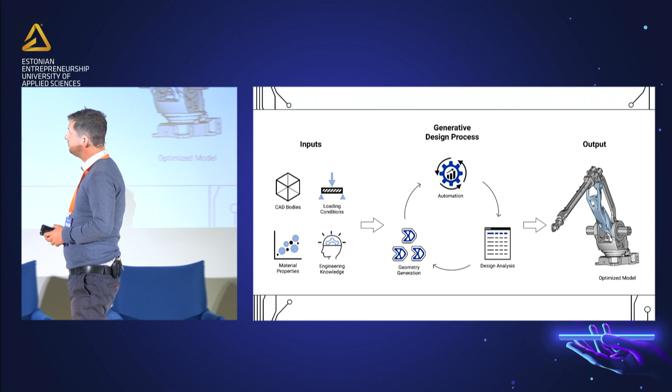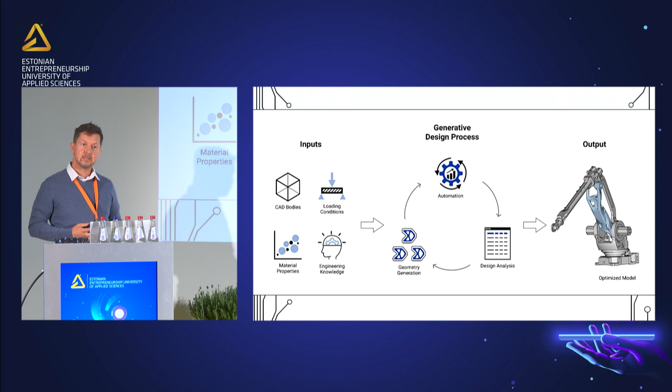What are we actually doing as a scientist? We, of course, are trying to realize our ideas because we are living in a society that tries to think of ourselves as humans who are actually advanced. But is technology so advanced that we cannot resolve some very interesting questions, such as how can I do something, or how can I transfer myself from point A to point B - there are things that are actually universal.

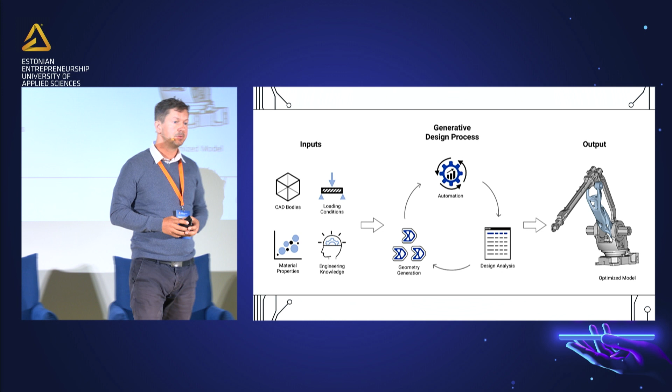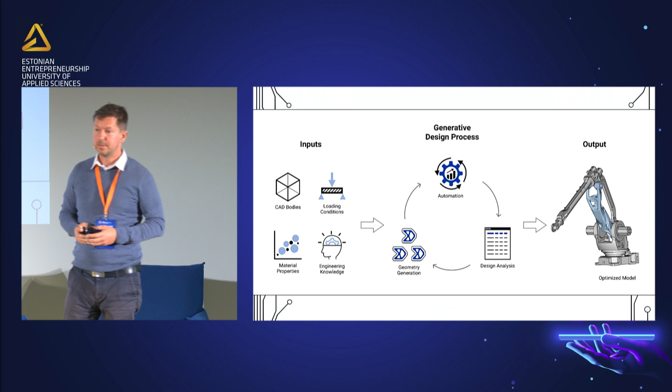Robotic arms, combined with AI, I think present enough challenge, and I will show you today some of the results where we succeeded in applying CAE, computer-aided engineering, to additive manufacturing, a bit of CNC machining, and of course some parts of educational production of a robotic arm with 3 degrees of freedom (DOF). That was the first step, actually.

When I mention robotic arm, you're always thinking about some RoboCop who will cut or chop off your head or something. But for me, as a technology enthusiast, I'm always thinking what possible functions those robotic arms could have. So maybe it can take care of your children, the cradle of your babies. Maybe it can bring a glass of water to your old grandmama or grandfather. Maybe it can do lots of interesting stuff and help you if you are a deaf person and you need to learn sign language.

Together with my students from the Faculty of Medicine, we developed one small application, and the program itself can recognize the first 4 letters of sign language. And that's something that is very important.

Why are you so serious? Okay, that's much better.

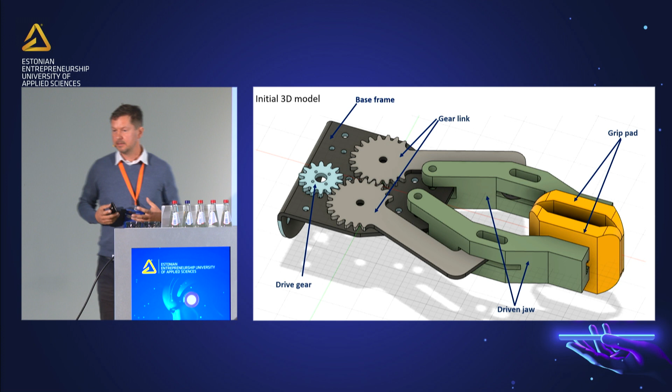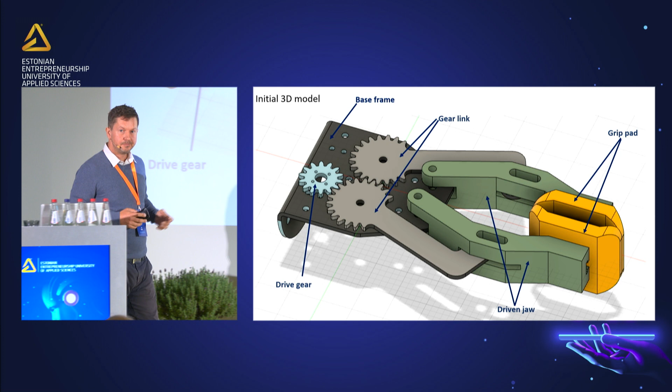Someone mentioned that everything in life should be play, and humans are actually much better at learning and comprehending something if we are playing. So let this event and day be one of the nice games that we can play in order to learn something new.

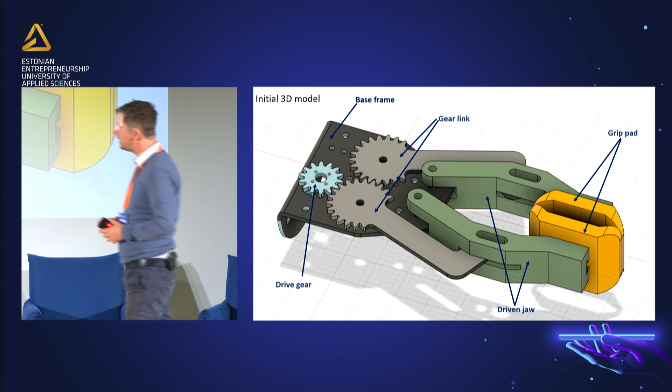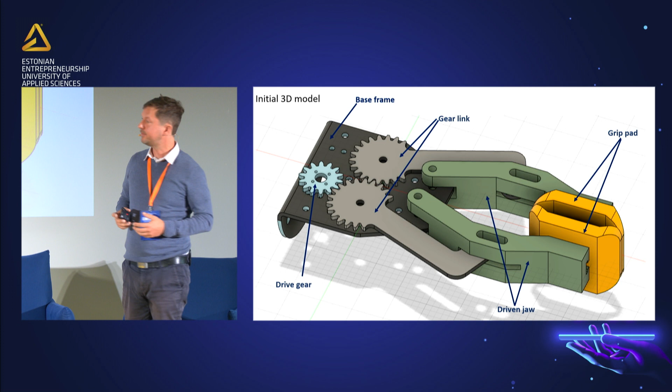The main motivation of dealing with robotic arms was that we would like to achieve and decrease some of the materials used inside. We also did analysis of structural elements, and with the help of generative design, which is based on AI tools, we achieved one remarkable thing: 20% less material and 15% less production time from this initial 3D model.

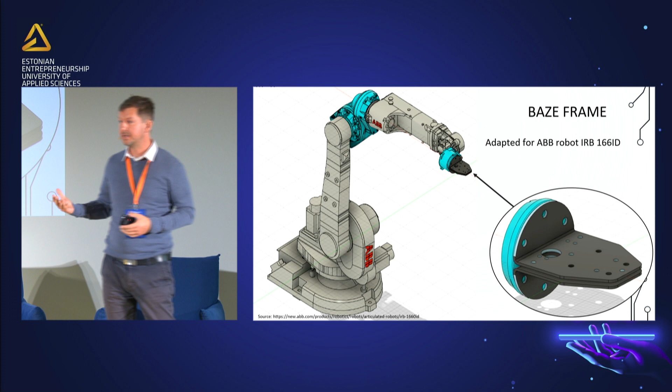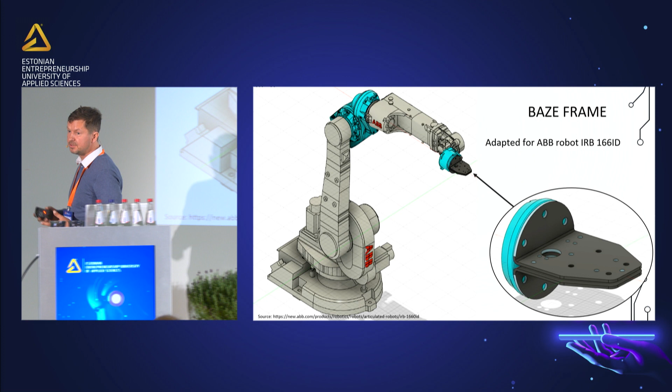The next one was actually where we were going to implement it. So one of the first ideas was standard ABB, which stands for ASEA Brown Boveri, a very famous manufacturer of robotic arms. And we said maybe we can try to make an end effector for 4, 5, 6 degrees of freedom equipment, and therefore we decided to try our best and see which type of technologies we could actually use.

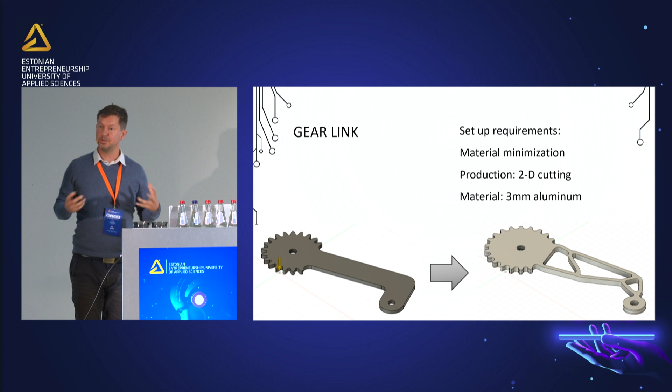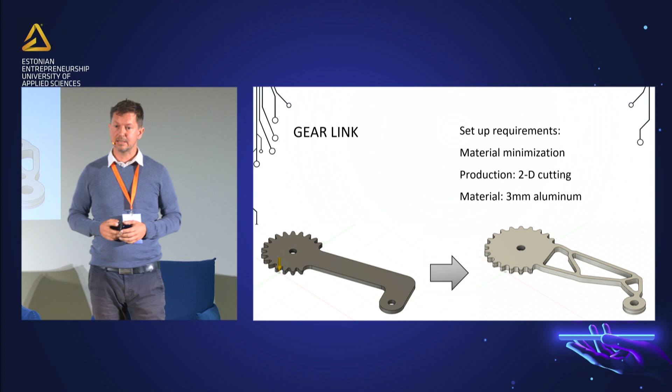So we decided to use 2 types of technologies. First was cutting of aluminium materials, and second one was, of course, as I mentioned previously, 3D printing slash additive manufacturing. From aluminium material, we did the first type of optimization, and it was pretty straightforward. We were very satisfied with the results, and we then proceeded to do the next thing.

Next thing was a bit more complicated. Why? Because when we are struggling with three-dimensional things, we need to take into account several outcomes, such as forces, payloads, moments of inertia, etc. Okay, now it's boring, so you can be serious - then I will stop, no more ice-breaking jokes for you.

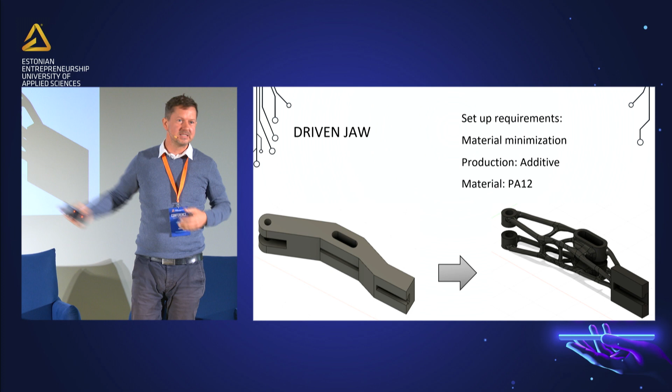Then we decided to go one iteration over another, and after 100 generations, we got this type of solution. For today's presentation, I brought also a live model, so I'll be very happy to show you how it looks like live - not live, I mean in silico, living at the moment in my computer. But we also did 3D printing of the whole model.

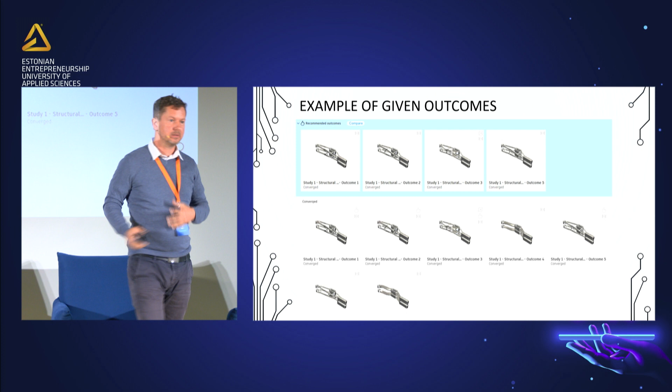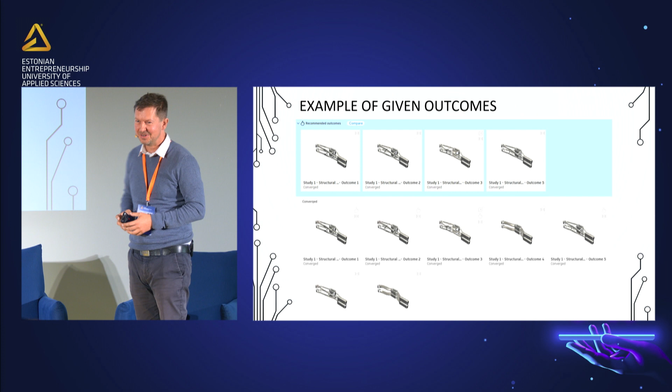So one part of the studying has been presented here. I'll be more than happy to answer all possible questions, and maybe later we can also discuss something in English, of course. My Swedish is also not so good.

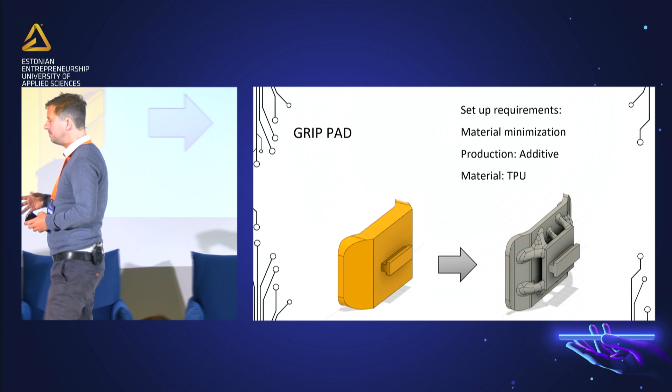What was also important here, actually, for the grip pad we took one very basic element which was not too complicated for us, and then we tried to decrease the amount of material needed to produce it, and to see how many strategies of producing and manufacturing can actually be used to produce this part.

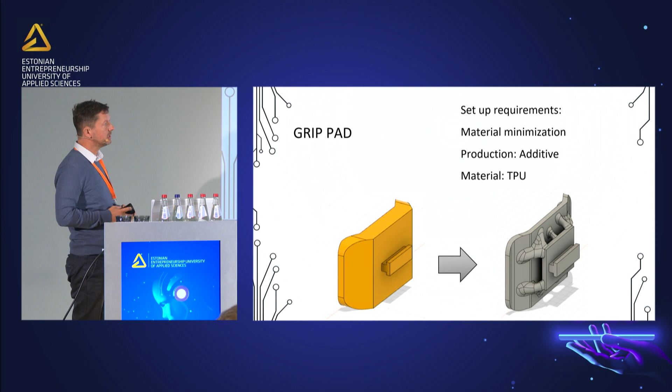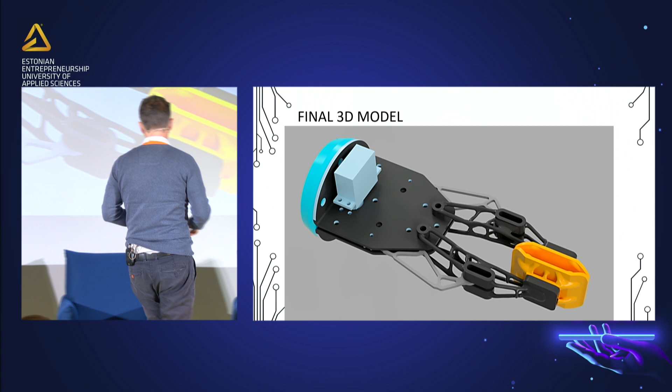So we used TPU material, additive manufacturing, and that's more or less regarding the setup requirements. That was the final version, final 3D model. And as you can see, the things I'm showing here now were actually obtained with the help of AI. So that's the aim of optimization.

How do you like it? Hoping that... Wow, cool. Oh, wait.

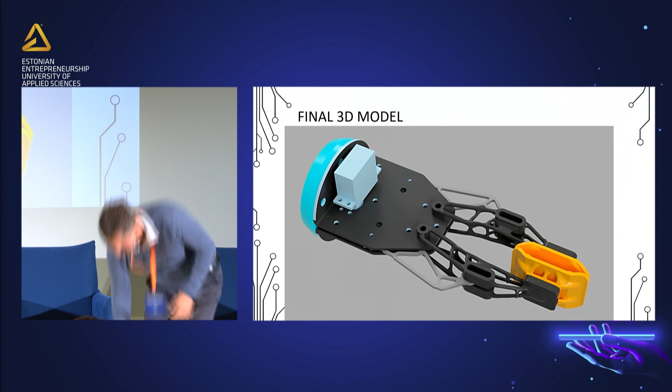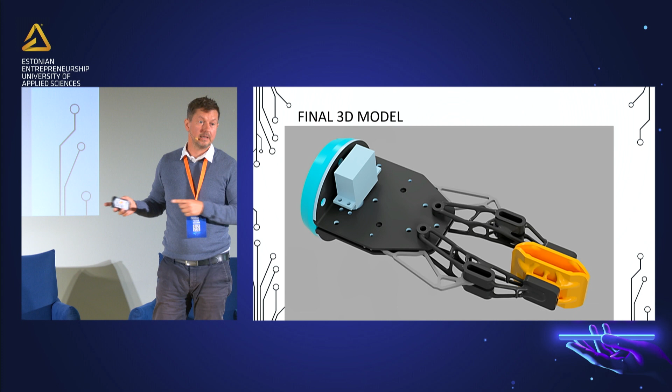Thank you very much. A few more slides, and then I will show you the model in real life, how we did it actually in production. So we tried to work with materials that are on the market.

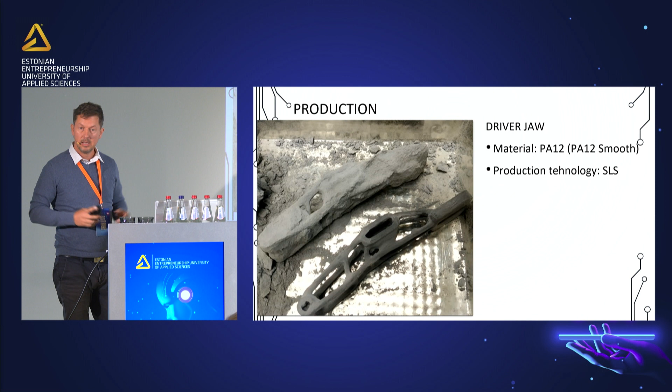In the next iteration, continuation of the project will be to take into consideration environmental materials as well, such as different types of polymers that are more eco-friendly than this one.

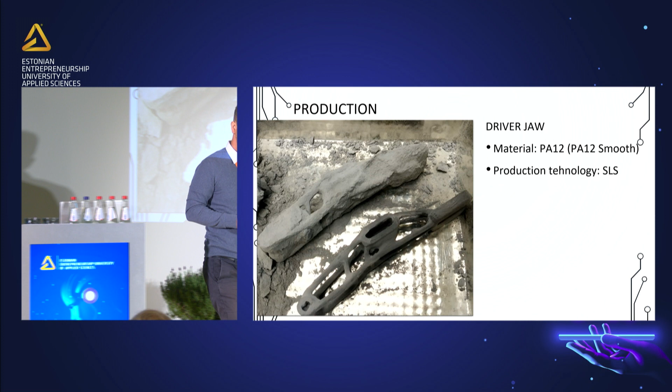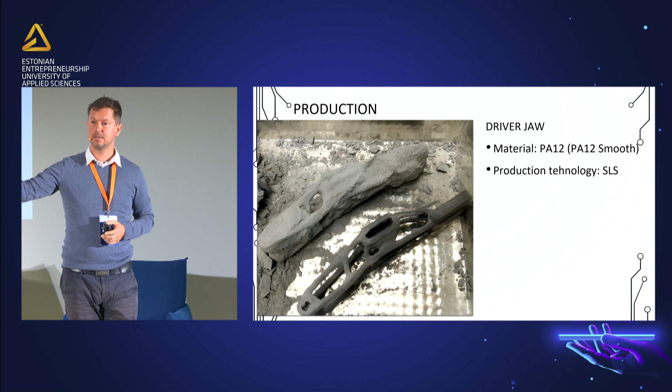And we are also thinking, if we do robotics for children, for kids, that we will collect bottles and try to make from that type of polymer material an effector for robotic arms. Imagine if you can collect 100 bottles, and in that way you can donate to a kindergarten in your own city, in your town. That's one of the ideas we would like to include.

That's also one part during the production time. Material was PA12, gray standard material, and SLS technology.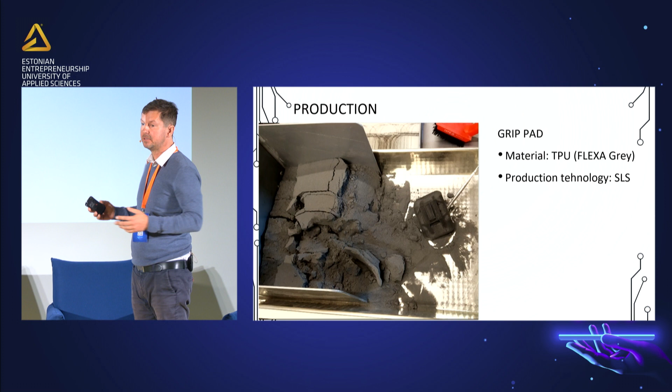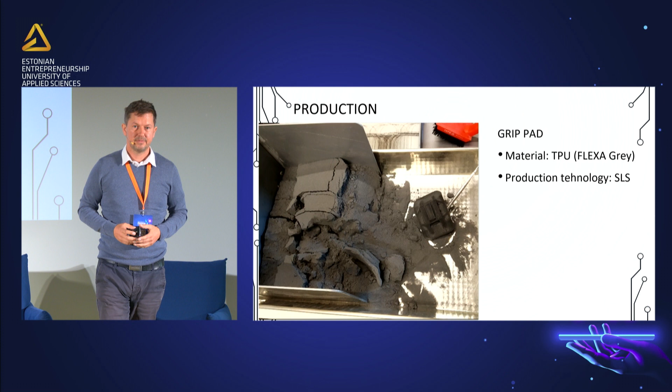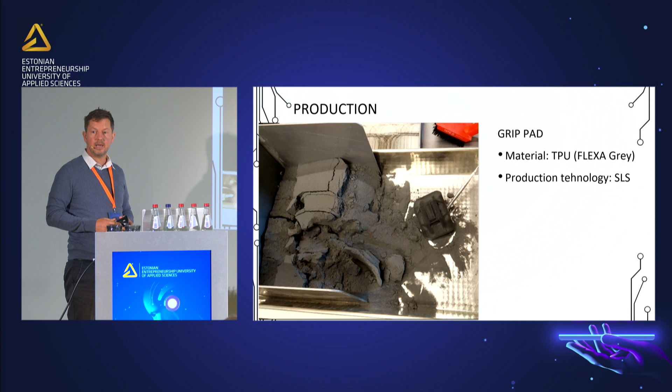You know that nowadays there are very broad materials being brought to the market, from different types of polymers to aluminium alloys to titanium alloys that are also being used in the biomedical field. And of course, the only question is actually the importance of time, of money, and the quality of finished surface. That's also very, very important.

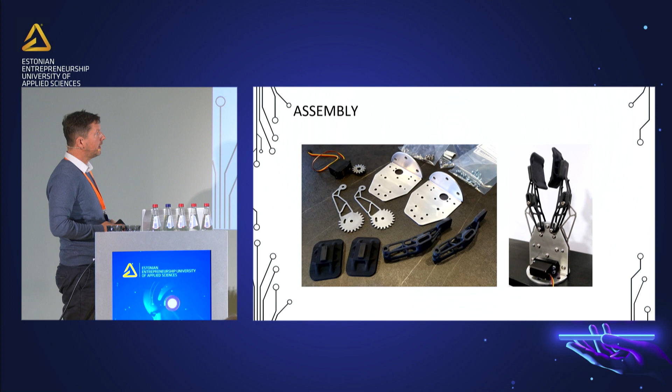Assembly, which actually passed very smoothly. So it was very straightforward, and it's working out of the box, as we prefer to say.

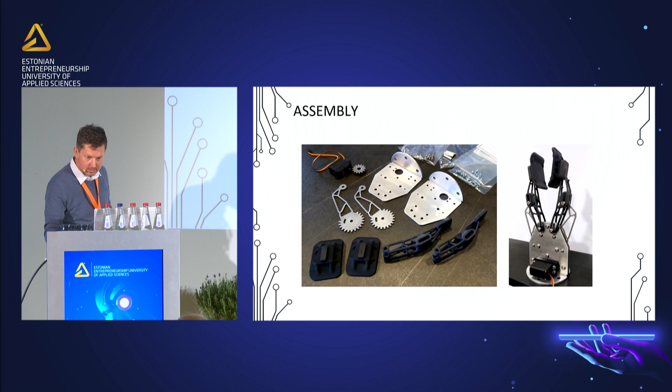Now it's my great pleasure to show you here the arm. Okay, yes, I need to exit. Sorry, I cannot see it, but you cannot. Okay.

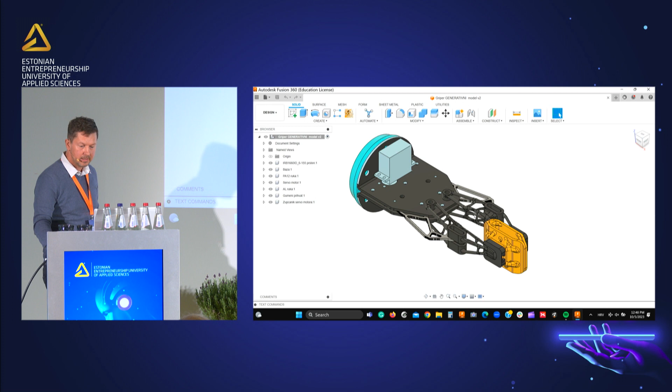Okay, much better. So in this program solution, we can actually try to analyze the robotic arm movements. We can rotate, zoom, pan. We can even inspect construction sections, and we can then also make further optimization towards our project aims.

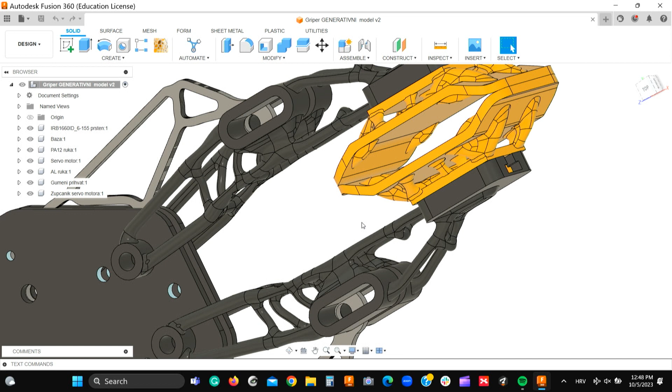What is most important here is that in every step of this project, we can also take into account different suggestions, and you can count that in the next 3 to 5 months we will also have a new version, and then we will start to investigate whether it can be produced from the water bottles that we'll be collecting all around.

So unfortunately, I'm flying with Ryanair and I have just 10 kilos of baggage with me, so I cannot start to collect the bottles. So drink your water, refresh yourself, and next year we will start to collect the bottles. I mean, it's a real thing, you know, Ryanair 10 kilos, otherwise you need to pay 20 euros more.

Okay, and for conclusion, I need to say that what we achieved here was 2 or 3 things. First of all, it was aimed for educational purposes. Second, the procedure and research conducted actually resulted in an optimized model with 15 to 20% less material and around 10% less time.

Of course, the numbers are always just numbers. Why? Because we developed several models with different sizes and different approaches. This model that I'm presenting at the moment was our latest model, and we are very satisfied with it, and we are thinking that further inspection and analysis will also be conducted here.

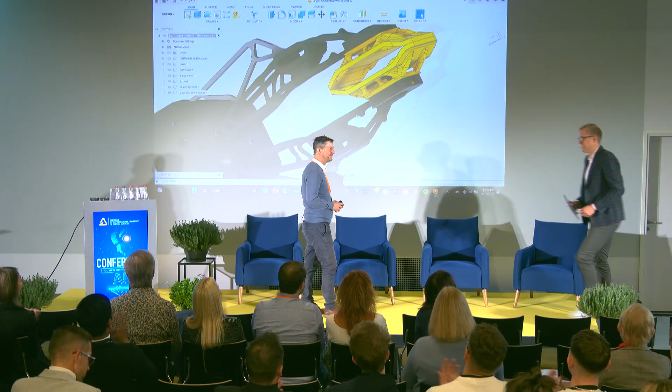Just one question. What kind of potential do you see for this technology in the future?

Yes, it has huge potential, especially in educational format. Why? Because maybe you can bring your own Lego devices, Lego setup of this one, because at the moment it cannot be assembled just like this. You need to have Phillips screwdrivers, etc.

But one of the ideas is, since you mentioned that, maybe it could also be produced in a way that we can assemble it like a Lego form, and that's one of the possibilities as well. Excellent. Thank you so much, Sven.